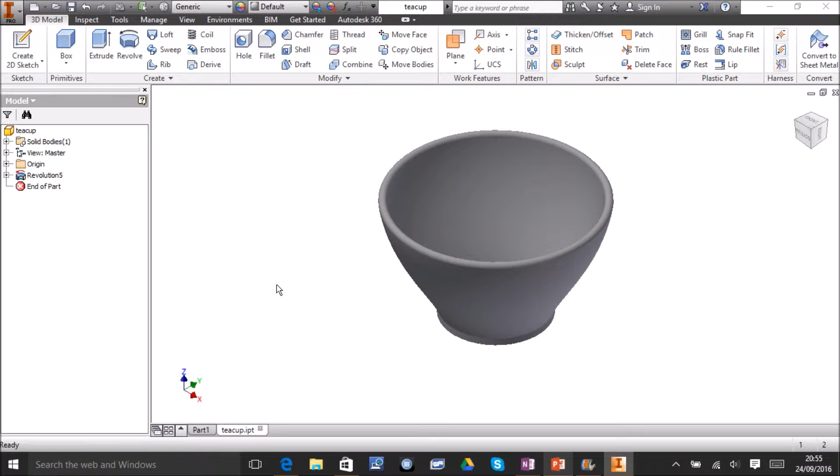alone. In this case, I've got the little teacup from the Revolve video, the one that was desperately needing a handle, and we are going to put the handle on it. So first thing I've got to do is I have to make two things. I need to make a sketch for a profile that is going to be extruded, and I need to make the path that is going to be extruded along.

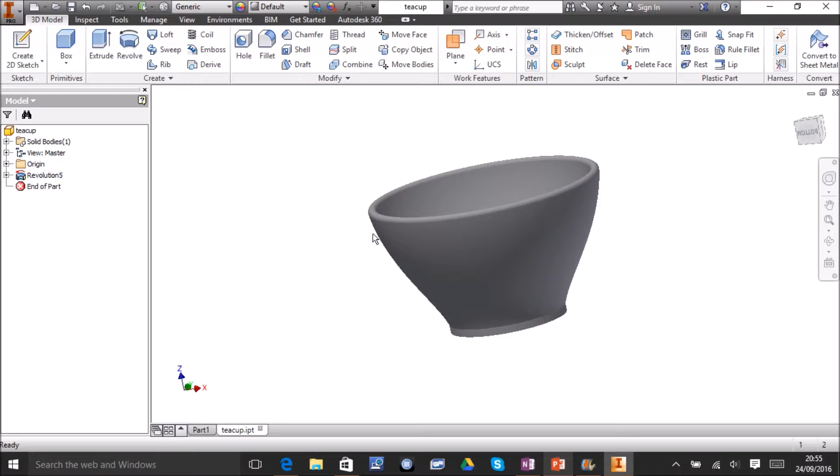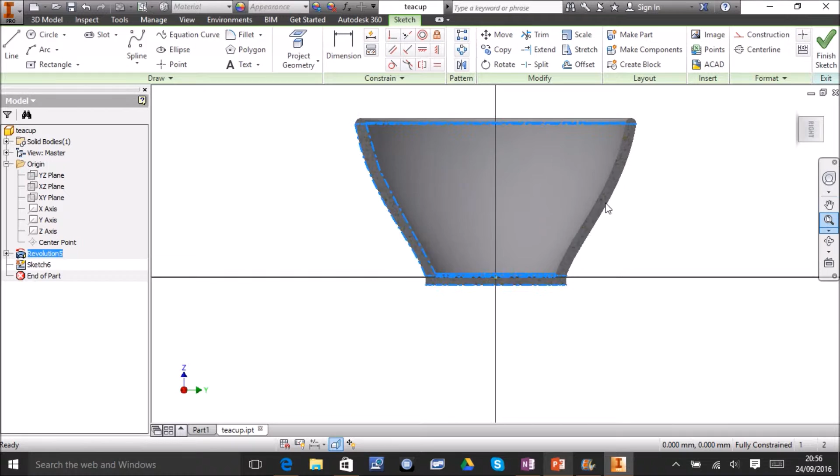Now in this case I think I'm going to make the path first, so I'm looking for a work plane that cuts through my teacup, and as I like doing, I'm going to use slice graphics so that I can see a lot better and more clearly what's going on inside the sketch that I'm making. So I'm wanting to make a little handle here. I'm just going to pan over a little bit, and to do that I'm going to use the spline tool.

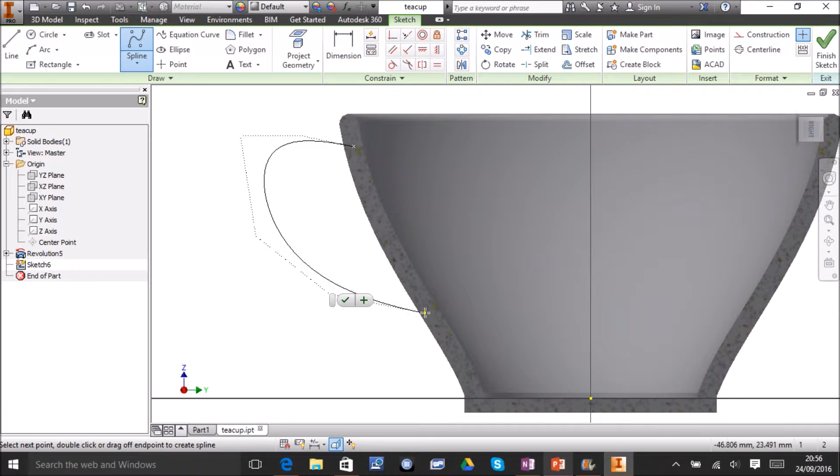So I'm going to draw from inside the cup. I'm going to draw just a little handle shape, like so. Making sure that I finish it and I start it inside the material, not on the edge, because this is a sloping surface, if I start it on the edge I end up with a little gap, which is quite difficult to deal with. So that finishes off my path that this is going to be extruded along.

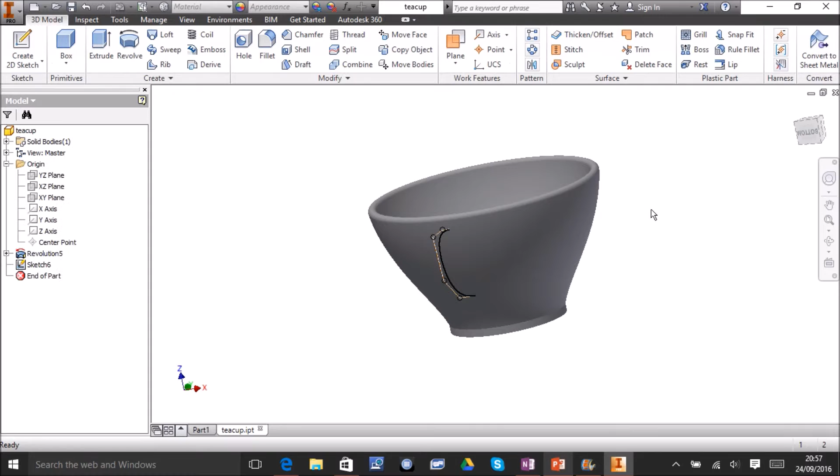What I need now is I need the profile that is going to be extruded along that path. To do that, I need to make a profile at the beginning or the end of this little line. Now that's a little bit tricky, especially on this particular object which has got curved surfaces.

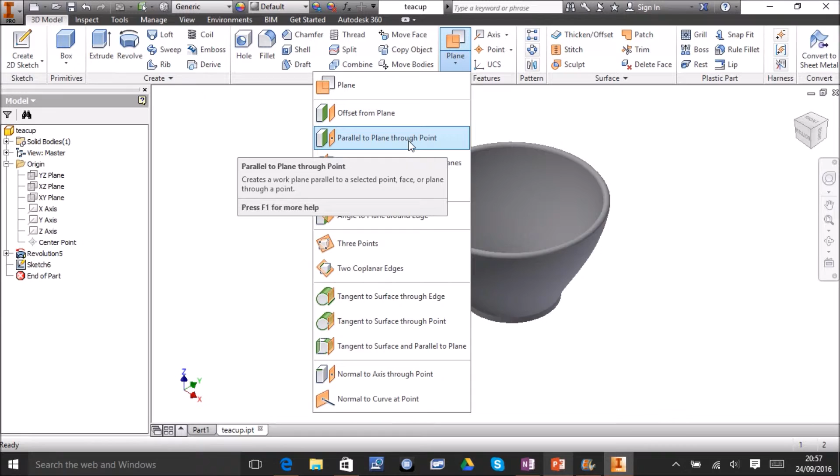So I'm going to use something called parallel to plane through point, because I want my profile, my sketch, to be parallel to this plane, and I want it to go through that point, which you can just see in red, and that's the beginning of my path. So if I click that, I've now created a work plane just where that path starts.

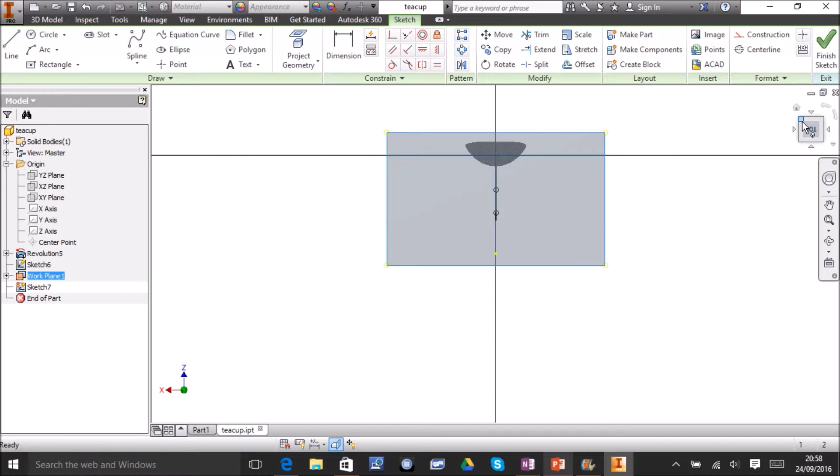So now when I make a sketch, I'm going to do the same thing again, I'm going to use my new work plane, right click, slice graphics, so that I can see what's going on. Now I'm going to use project geometry to grab that point so that I know that I'm definitely drawing in the correct place, and then I am going to draw the profile. Now I'm going to do a little elliptical handle, but you can do a circle, it can be a square, rectangle, any kind of shape.

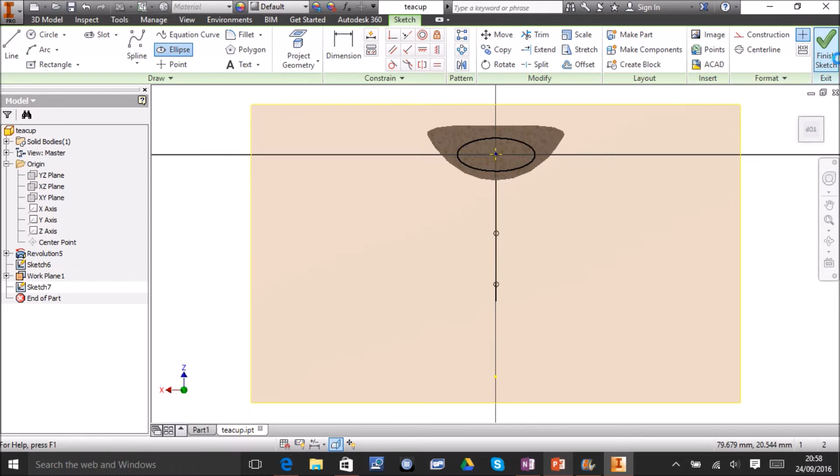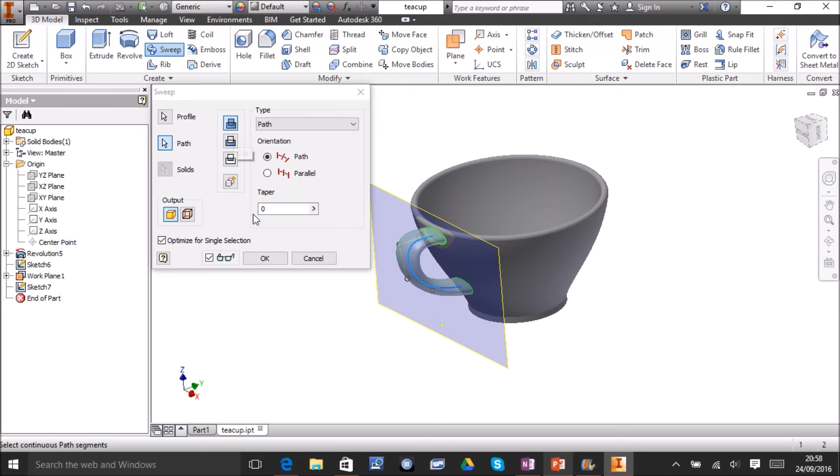And then our extrude along a path in Inventor, it's called sweep. So here's my sweep. If I click it, it's up in the Create tab, and it should have auto-selected my profile and the path that I want to sweep it along. So that's quite good. I could also do this to cut, but it's quite rare that you need to cut with a sweep, so I'm not going to show it, but you would just use that to subtract the material instead. So if I click OK, there we go, there's the handle for my cup.

It doesn't go inside it, it stays perfectly on the outside. The one thing that is a bit of an issue, which I'll need to go back and modify, is if you do look closely, the sweep is not perfect in there. So when my path went in, it would need to go into the material of the cup a little bit more, but I can change that later. So that is extruding along a path.